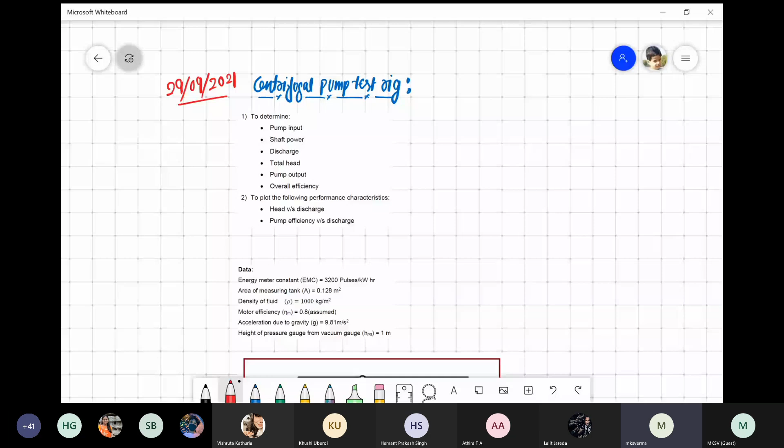So here, if you see, can you see the screen, guys? Yes, sir. You can see the screen, right? Yes, sir. Okay.

So I think you have already studied the centrifugal pump in the fluid mechanics course: what the centrifugal pump is and what its parts are. So can anyone tell me what parts are inside the centrifugal pump? You can tell me one by one. I will write them here. Sir, impeller. Okay, so first is impeller. Second one. Shaft. Okay.

Any other? Yeah, Vishruta, you are telling something, right? Yes, sir, I said suction nozzle. Suction nozzle. Okay, we can say the nozzle. But still, if I have these three parts, I don't think I can pump the fluid or water, right? Sir, motor. Okay, that's good.

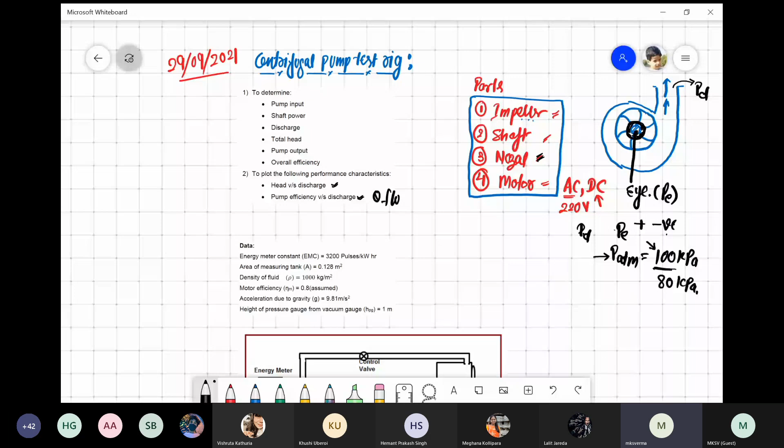So when I say discharge, it means the flow rate. Okay? So you can say liter per minute, or a more appropriate unit is meter cube per second, or meter cube per minute. You can also write meter cube per hour, whatever is appropriate, right? So whenever we talk about the flow rate, we are looking at meter cube. Okay, so you can convert that. There is a way you can measure it.

So when you want to plot this head versus discharge and pump efficiency versus discharge, what are the parameters you have to determine? Right? These are given here, like you should know the pump input. When we say pump input, what is that? There are two things. One is the energy you are putting in the motor, this one, right? In this test rig, I think we have a DC motor. So you will be using some voltage and current, right? So you can calculate how much energy is given to the motor.

Now, that's the actual energy you have put in the motor. I will say that this is my motor and it is connected to the pump, right? So this is the pump and this is the motor, right? So I'm putting some energy here, right? I can call it EM.

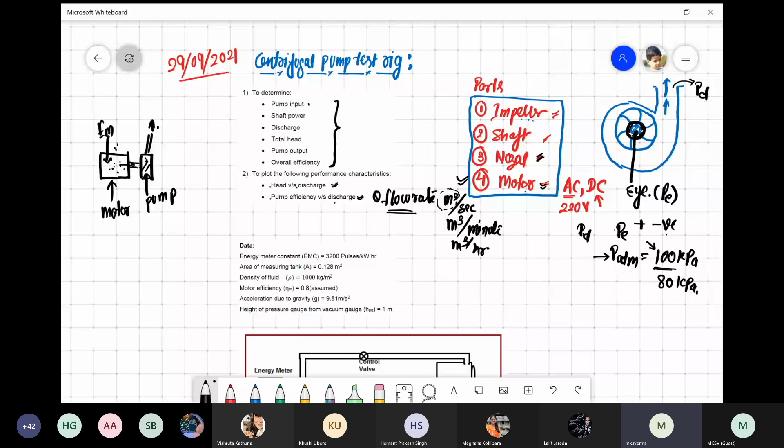So those things we will be measuring, and how are we going to measure them? We'll just go and look at our setup here. If you have any question in between, just feel free to ask. We'll go slowly. So here, as we have mentioned, you can see we are giving this energy to the motor, right?

So if you look here, this is our setup. Here we have the energy meter. This one is the energy meter. It will tell you how much energy we are giving to the motor, right? Then this motor is connected to the pump through what? This is the shaft.

Now, what are the other components in this setup? We have here two pressure gauges. One is called PD, the discharge pressure. And here we have a vacuum gauge, right? So it will give you the negative pressure. So this is called PS. We wrote here PE, but you can take it as PS, right?

Now there are two control valves. One is this one and another is this one. What's the need? We will see that. And there is this measuring tank. So why do we have a measuring tank here? With the measuring tank, for a given RPM, we can find how much water this pump is pumping, or what is the flow rate or discharge. That we can calculate using this measuring tank.

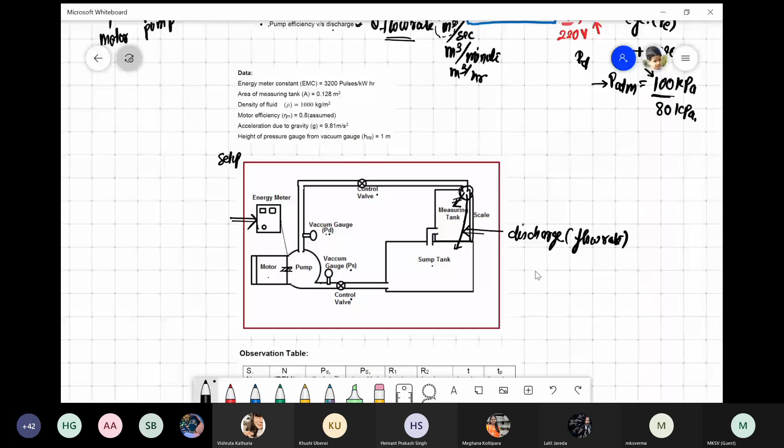Now there are a few parameters given in the manual. These data points: the EMC, energy meter constant, which is just meter specific. So these are the constants given. Area of measuring tank, this one.

If you know the area of this measuring tank, then you just have to measure how the height is changing, height as a function of time. Based on that, you can convert to flow rate: area multiplied by height gives volume, and dividing by the time delta T gives the flow rate. And density of fluid: we are using water, so that is 1000 kg per meter cube.

Motor efficiency: whatever energy we are putting into the motor, it may not all get transferred to the shaft. The shaft energy is the actual energy transferred to the pump. So we should know the motor efficiency. Normally when you buy a motor, the company gives you its efficiency.

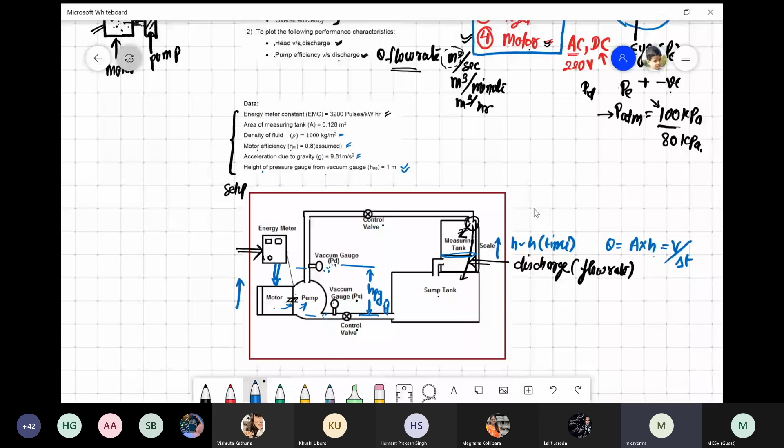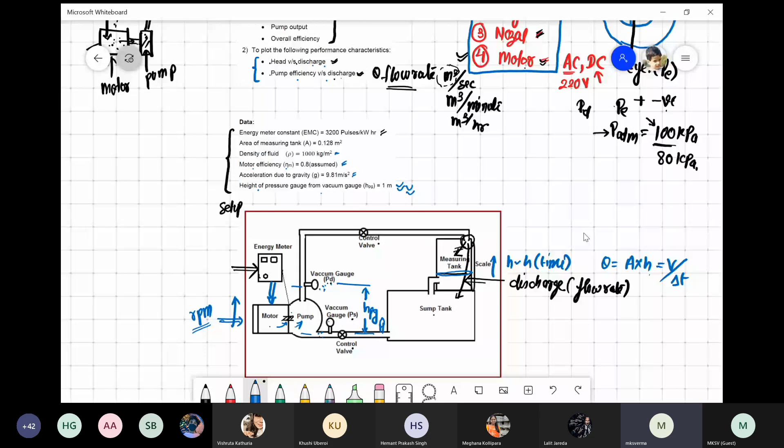Now, these are the two objectives: head versus discharge, and pump efficiency versus discharge rate. In your video you might have seen how to start the setup and how to change the RPM of this motor. Because this is a DC motor, changing RPM is easy: just change the voltage. Other AC motors can control RPM too, but this is the simplest setup. You fix the RPM, then look at the discharge and the gauge pressures.

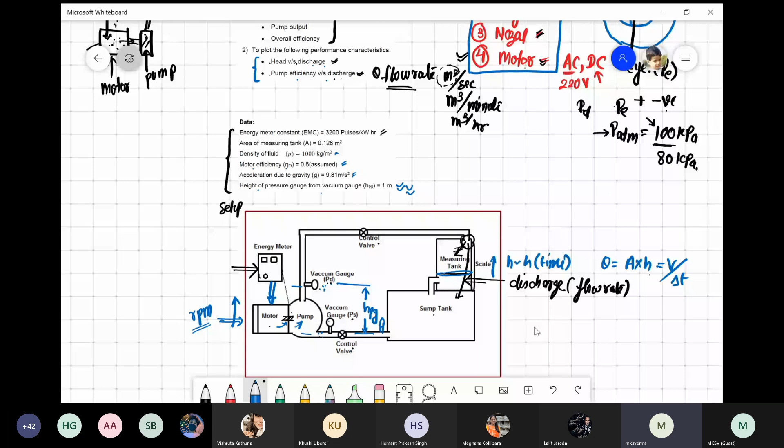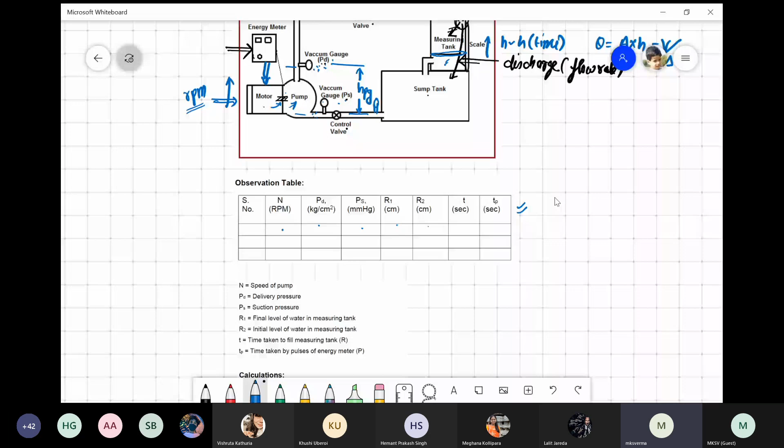So this is the observation table where you fill in the RPM, PD, PS, R1 in centimeter, R2. So what are R1 and R2? Let's see. Final level of water in the measuring tank. Let me show how this measuring tank looks. This measuring tank has a glass.

Yeah, any question? Hello?

Any question? Okay, if there are no questions, that's fine, right?

So what are these R1 and R2? They are actually here, those readings. So these are this tube height here. Suppose I have waited like 1 minute, then I'm discharging the water here that is coming from the pump. So what will happen? It will keep rising, right? And it has reached a certain level. This area we know, what is the cross section area? This is A.

So what will this R1 and R2 give? It will give me the height change, this water level change here, directly, that I can use to measure my flow rate. And what is this T? This is the T, you have one, actually this is a stopwatch. So what you can do is switch on that stopwatch and calculate how much time you have spent between R1 to R2. That's delta T. Based on that, you can calculate the discharge rate.

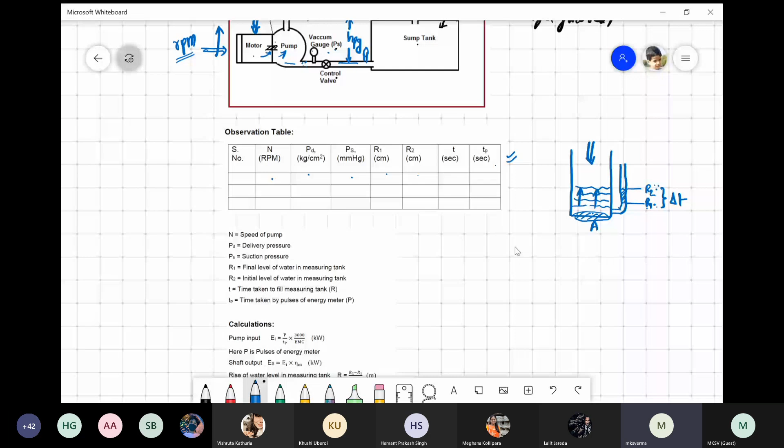Sir, why is PD more than PS? Okay, why is PD more? Because, as I know, fluid flows from high pressure to low pressure.

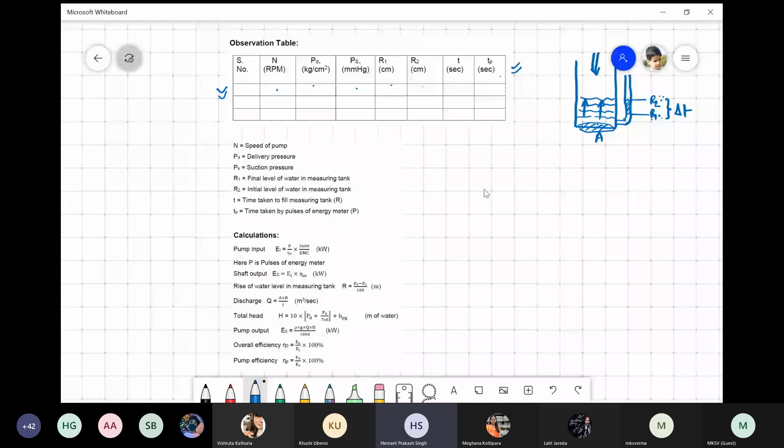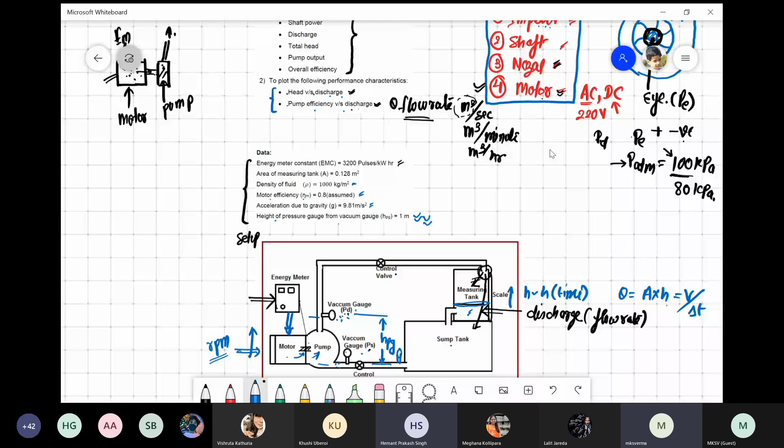Okay, but what is happening? Let me see. What is the working principle of centrifugal pump, you know, right? What is happening, the water is... have you studied the forced vortex? Yes sir. So what is happening, this impeller, right, it is rotating. And when it is rotating, it is actually creating some kind of vortex here. And if some fluid element is here, it is rotating. So what happens if it is rotating, let's say, with some angular velocity?

So what will that generate? It will generate one centrifugal force in this direction, right? It's like you take one stone, put one string and rotate it faster. What will happen? It will generate centrifugal force, right? This centrifugal force is actually resulting in this pressure head, whatever this pump is generating. So now this centrifugal force wants to move the liquid from here to here. So here, let's say this is the PD, right?

Now if you look at the continuity equation, whatever fluid is there, if it is moving from here to here, then what will happen? Some fluid has to come and occupy this one, but if you look in terms of pressure, there will be lower pressure here. That is called, so they have taken here PS, right?

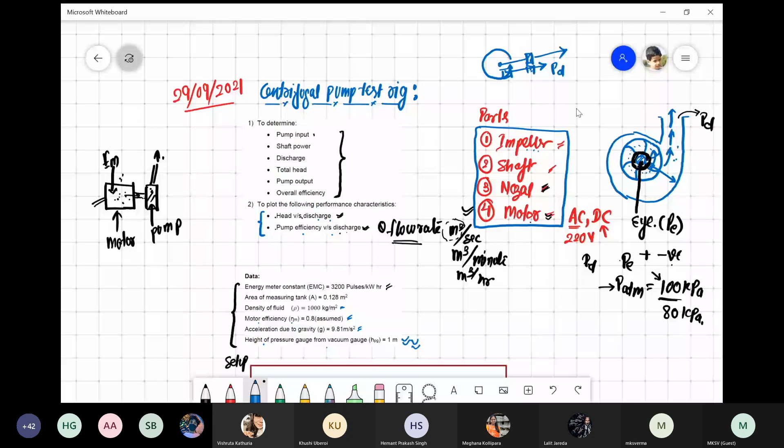This is the mechanism by which you are getting these two pressures. Is that clear? Yes sir. Because whatever fluid element is, because of centrifugal force, it has to move in this direction. So actually it is not pressure driven flow. If you see, it's a centrifugal force driven flow, you can say that.

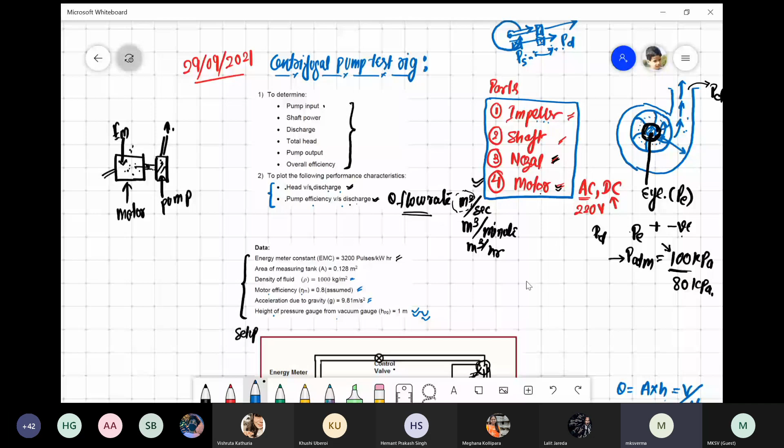But so here you are right that it is moving from low pressure to high pressure. But if I talk about here to here, now you tell me, here to here, what is the flow? Is it a pressure driven flow or not? Now you have high pressure here, right? As you go along this tube, this high pressure is actually pushing the liquid to this discharge tank. So here, this is the case of pressure-driven flow.

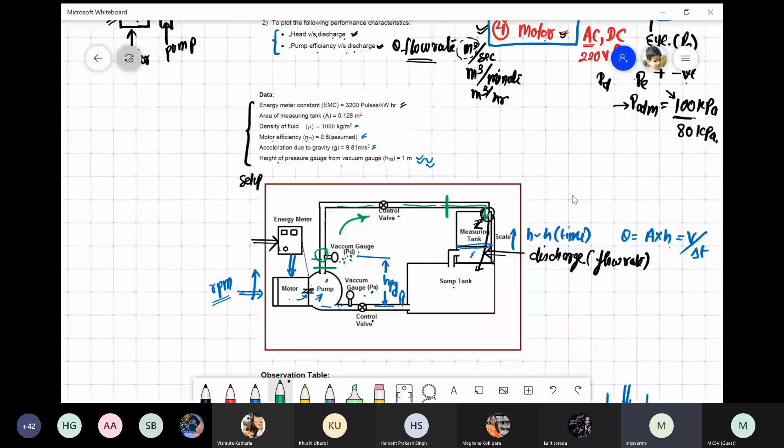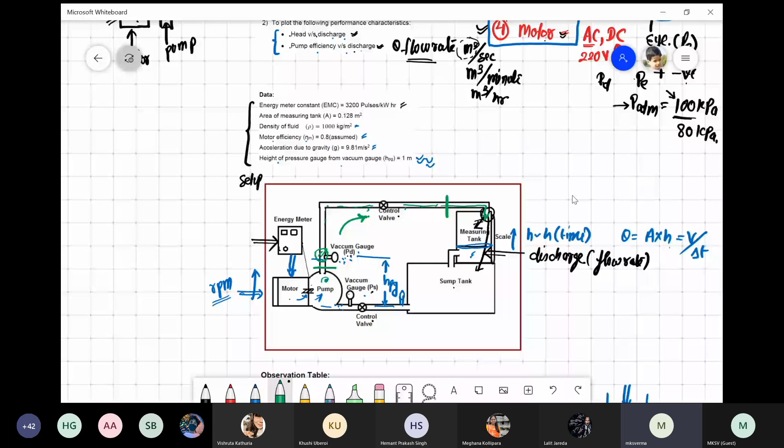I just talk about the pipeline, that's all. But this pressure is generated by what? This pressure is generated by the centrifugal force, right? That's why it is called the centrifugal pump. Is that clear? Yes sir.

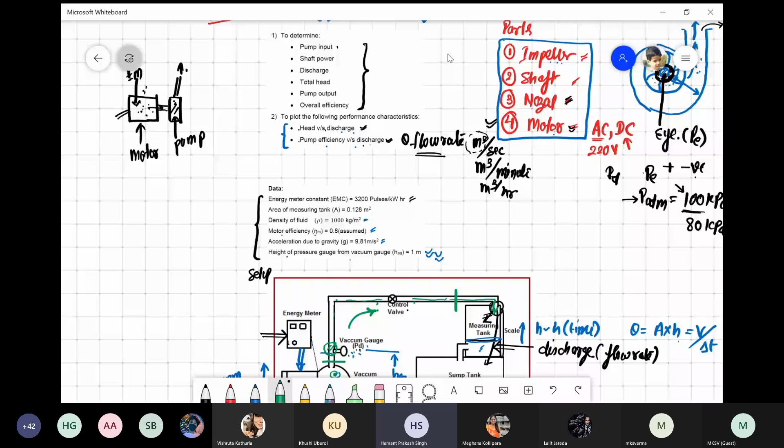And what happens from sump tank to this pump? Okay, but okay, so what happens, right? So two things are there. When I'm running this centrifugal pump, there should always be liquid inside this pump. If liquid inside the pump is not there, then it will be freely rotating, and that is not good for the motor. That is one thing. So now the question comes, why do we want to keep this sump tank?

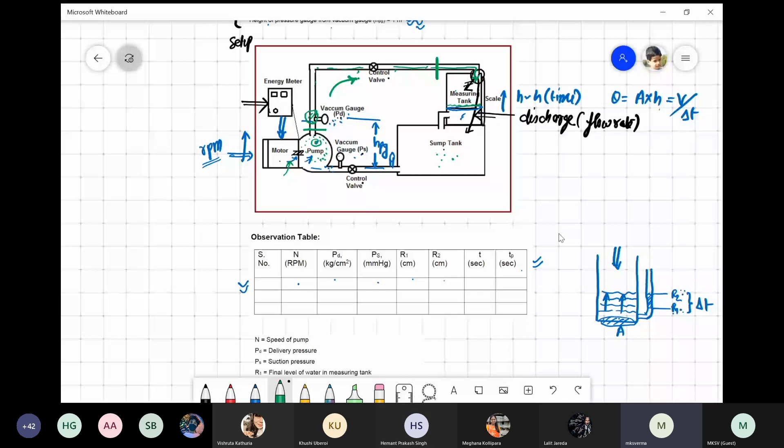While I'm measuring this flow rate discharge, I'm just collecting this liquid in this loop. If I don't have sump tank, then from where will the water come? Let's say it was directly connected to this pipe. Now, to measure this flow rate, I have disconnected it completely. Now all the flow rate is going to the measuring tank. So what happens if there is no water in that? Suddenly there will be cavitation, and suddenly there will be no water inside this pump, because all the water has just been pumped into this.

In that case, what will happen? This impeller will be freely rotating at higher RPM, and that will actually damage the pump. So to facilitate that, when I am measuring, there should be some backup water. That is this sump tank. So even though there is no discharge water coming for a short time, there is still enough water that can circulate.

I was asking from sump tank to the pump - is it pressure driven or centrifugal force driven? No, it's pressure driven, because when we talk about centrifugal force, until it reaches the eye of the impeller, there is no centrifugal force. So it's a pressure driven force, right?

Here, what is happening? This sump tank is open to atmospheric pressure, right? And what is the eye pressure here? Eye pressure is lower than the atmosphere. So still here also, it is pressure driven flow, right?

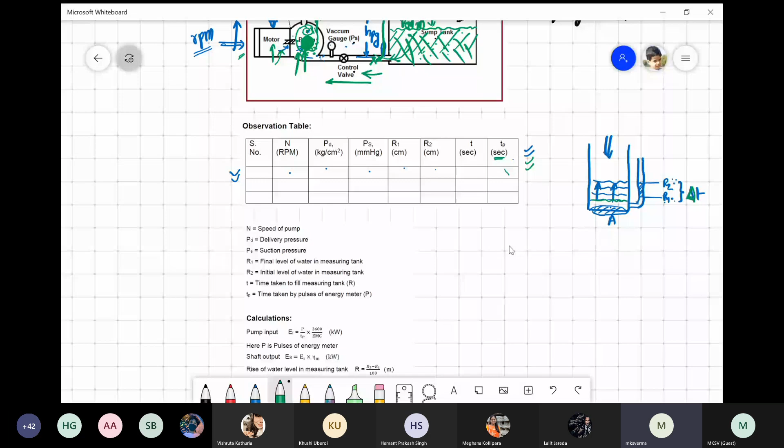Let me check this one. Okay, yeah, there are two things, right. So TP, this one is for the energy meter - 1 minute. This is for the energy meter, right?

So let's look at how we are going to use the TP. As I told you, we should know how much energy we are putting into the motor, right? This is the energy, right? Now, two ways are there.

If you ask me, simply I should know the current and I should know the voltage. I can multiply and I can get the energy. Is that correct? Yes, sir, a simple way, if we don't have an energy meter, right? So what you need to do is multiply by time as well, otherwise this is power only.

Yeah, that you can do. So the current you will get, you have to convert to watt, right? So this is watt-hour something. So this will be if you run it for 1 hour. But what information you should have? You should have these two.

So suppose that you are feeding this one, right? So you have one multimeter where current is passing. And there is also one voltmeter, which you will connect between these two things - this is volt and this is ampere, right? So then we can get how much energy we are putting inside this pump motor. Is that correct?

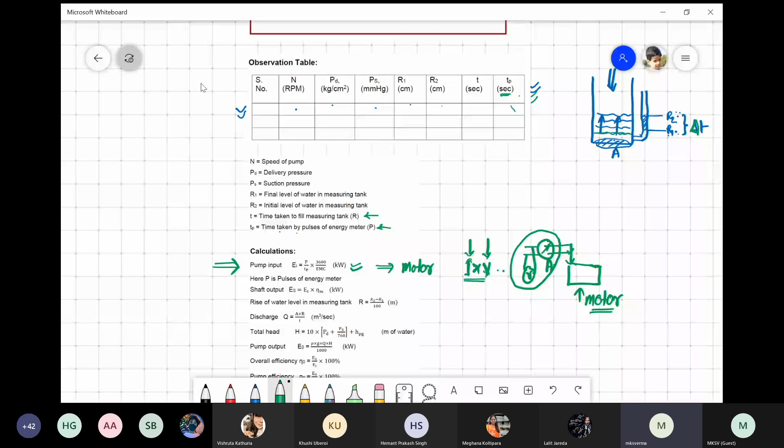In this case, we have direct this energy meter. This is the energy meter here. So we don't need to get the current and voltage separately. You know, at our home we have an energy meter.

Yes, sir. Have you seen this energy meter? Someone from the lab is there right now. Can you tell me what kind of energy meter we have here?

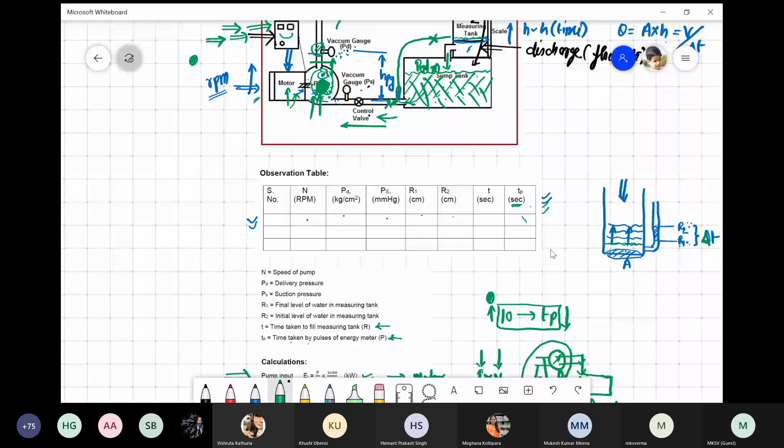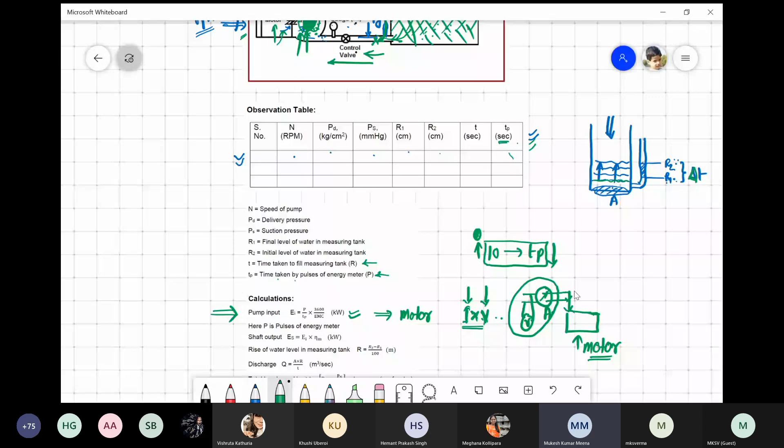So you are saying the energy consumed between two blinks is the same, right? So if we are asking for more energy, that means the blinks will be faster.

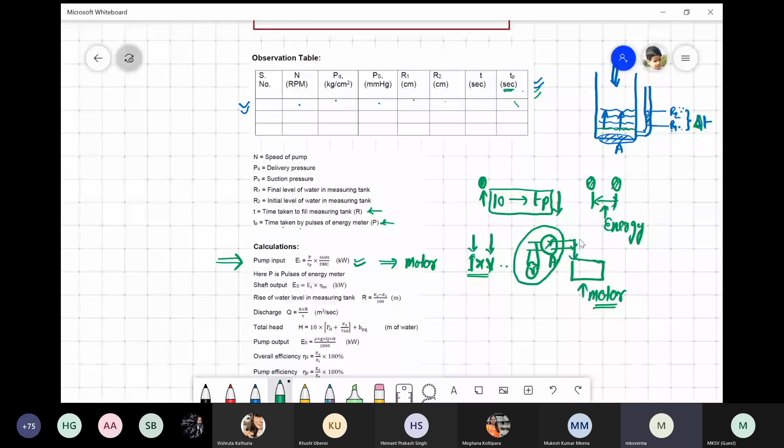Suppose I'm running at 1200 RPM, right? And these are the 10 blinks, right? It has taken, let's say, 20 seconds. This is the TP associated to 10 blinks, right?

Now, if I am running this at 600 RPM, what does it mean? Will it take more time or less time? Sir, more time. We don't have the exact relation, but we can say it will take like 50 to 60, let's say 50 seconds. Is that correct?

Please confirm. Hello, am I audible? Yes, sir, you are audible.

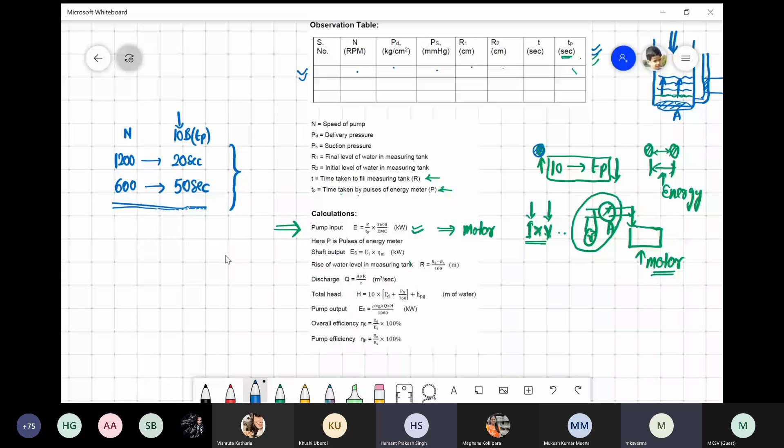Yes, sir. Are these energy meters similar to what we have at our homes? Because I can see my energy meter also blinks with LEDs. So, what used to happen, if you guys might have seen, right?

The old energy meter used to have one disc, and that disc used to have one red point. So suppose sometimes I'm just running a fan, then that disc used to rotate at a very slow pace. But when I run, say in winter, I switch on my heater, that disc used to rotate faster, right? What does it mean? One circle, meaning one rotation of that disk, was fixed for some unit, that was called a unit. So one rotation, one unit. The moment I consume more energy, it rotates faster within the fixed time, right?

So it will rotate more times, means I am consuming more energy during that given, let's say, 1 minute. Now, in this electronic meter, right now we don't have those. Now we have an electronic meter, so they might have put this LED. So this blink is nothing but similar to that rotation. So this single blink is what? This is 1 unit. You can say 1 unit.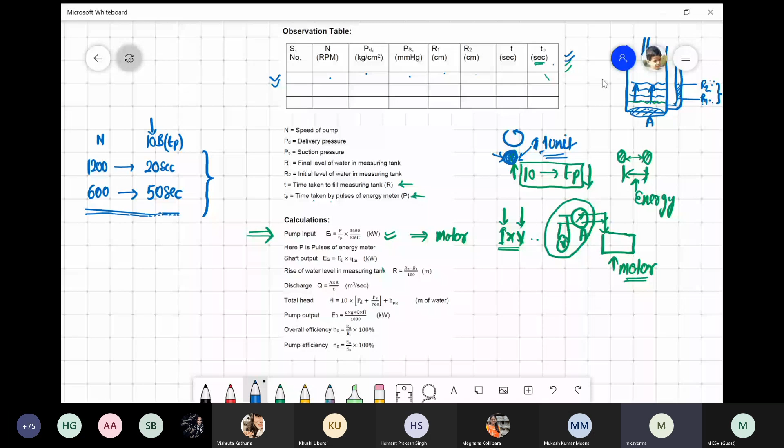Is that okay? So now there are two types. This is for the energy meter. And this is what? Discharge rate. Is that okay now? So now all the parameters are clear.

We have RPM; at a given RPM, let's say 1200, we will get one PD, one PS, R1 and R2, right? So this is to measure the flow rate. And this is the time to measure the flow rate, and TP, at what rate it is consuming the energy.

So once we have everything, then what we can do, we can use this pump input formula. It will give us what? Actual, let me see, okay. Time taken by pulses of energy meter P, okay. So this P here should be 10 actually, if we are taking. So this P is what? This should be 10 blinks, right?

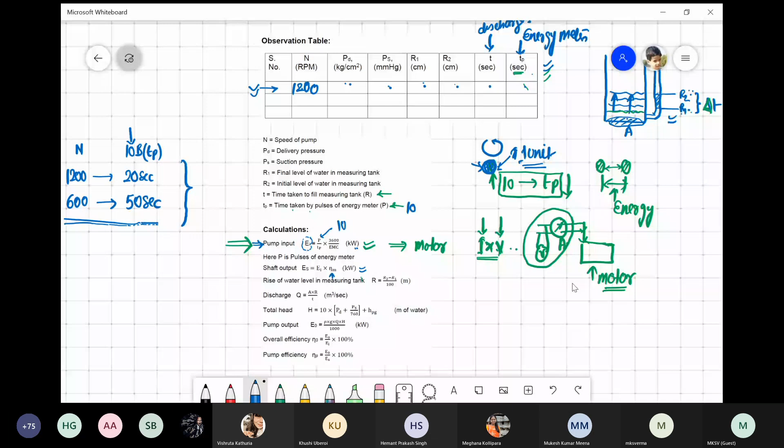So from this actually we can calculate how much energy we have given to the motor, not actually to the pump. This energy is given to the motor. Now, if I ask how much energy gets transferred to the shaft, right? Now you can use the same formula here. The motor has some efficiency that is given, and that efficiency is always less than 1. So we can see if it is given here. This is given 0.8, right? So you can use that.

So what that means, whatever energy I am giving to the motor is not fully getting transferred to the pump, but only 80% of that is getting transferred to the pump, right? Now this is the rise of water level in the measuring tank. So this will give us what? This will give us the flow rate.

So this one, R2 and R1, we can do that, and it is in centimeters, so we have to convert to meters. Once we get the height, area is known, R we know, that is the height, time we know, so it should give us the flow rate in meter cube per second. So that you can calculate, right?

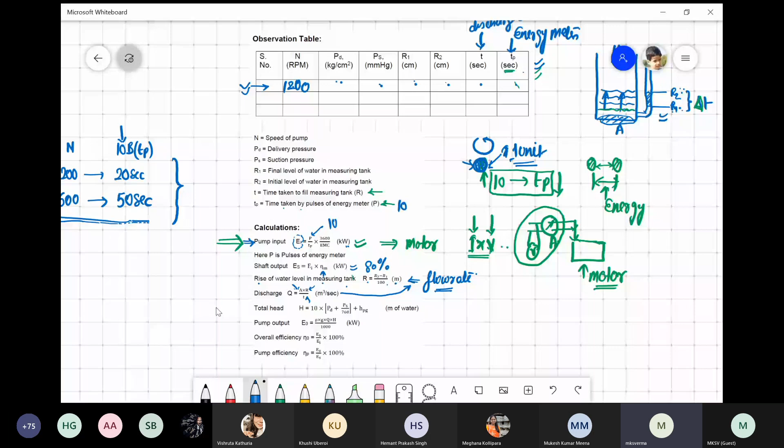Now, what is the total head? So how do you calculate the total head? So here the PD is given, that you can measure on the dial here. This one, right? So you can measure the PD. You also know the PS, because these dials are giving, I think, readings in mmHg. So what you can do, you can divide by 760.

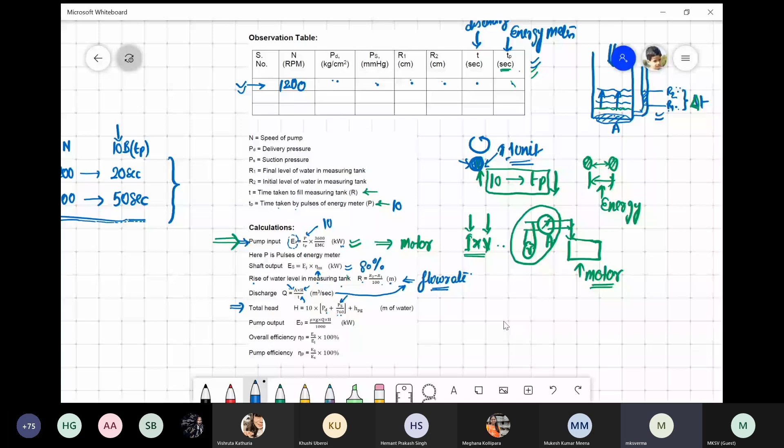Now one thing, this was also added in this one, right? This one is what? This is the same thing. We have to take care of this hydrostatic head between these two dials. So this height we have added here. So this will give us the head, or you can say the head is nothing but the water column height that we got.

Now, once we got this total head, we can calculate the pump output using this formula. But now we should know that this is the pump output, right? So when you want to know the overall efficiency, what you have to do: this was the actual power we transferred to the motor, and this is the power we got in terms of how much the pump is pumping.

As a means of measurement of this head, right? So this one will be the actual overall efficiency that includes motor plus pump. Now when you have to calculate the pump efficiency alone, not the motor, you have to use the shaft output. So you can just take the pump output and divide it by how much actual shaft energy has gone in. Using that, you can calculate these two.

Once you calculate, then what you have to plot, I will just show you the first plot. This is head versus discharge, right? Now you tell me one thing. Just suppose that there is one valve. This is the valve, right? If I close this valve completely, what will happen? What will be the head?

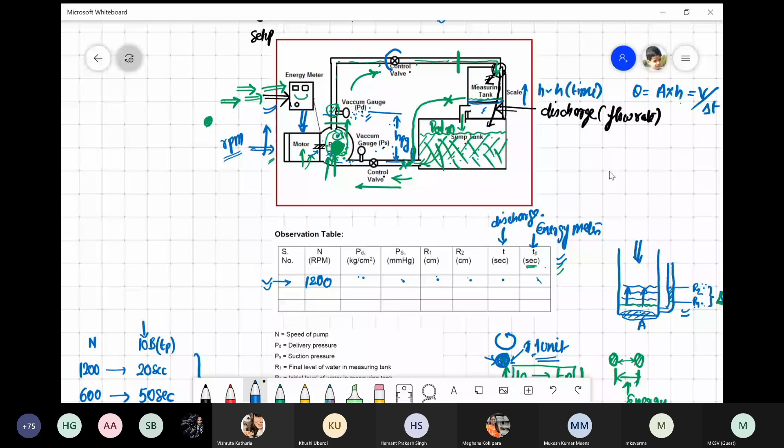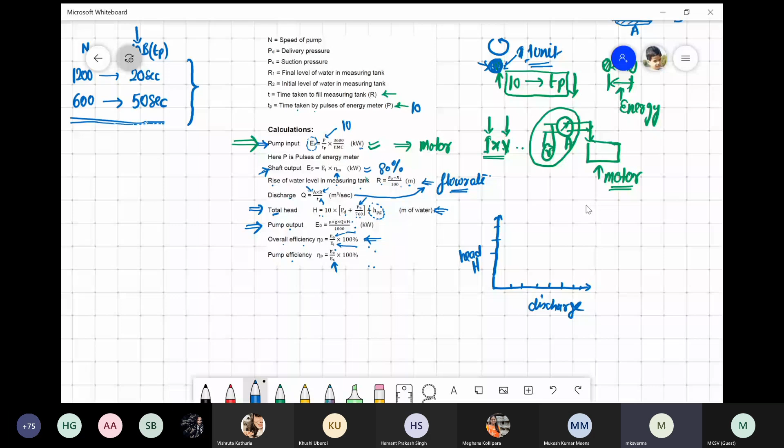So I'm just giving you 1st, 2nd, 3rd, 4th, 5th points, right? Let's say this is 4, 3, 2, 1. Now, can somebody help me with what the head will be? This is not to scale, I just put some numbers. I have just closed the outlet valve. So what does it mean? My discharge is 0. So what will be the head? When you close it, what is the height of the water column the pump can maintain? That will be the maximum, right?

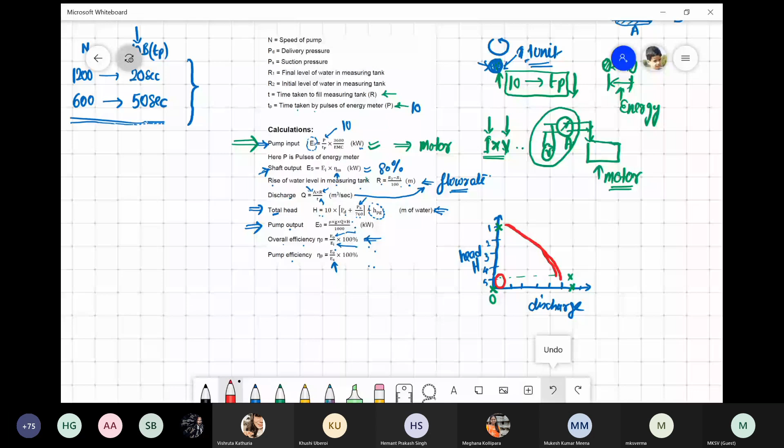What does it mean? You take one pump, this is one pipe, you make it horizontal or vertical. Vertical means there is no flow rate, so the head will be higher. And when there is flow, you have opened the discharge valve completely, so your head will be lower, right? This is just a representation, but you will get a similar plot for head and discharge. This is for a given RPM.

You have to repeat this at different RPMs also, right? So this is the experiment you have to do to get your pump characteristic, the overall efficiency and the pump efficiency. With that, I think we have covered almost everything. Now, any doubts, you may ask.

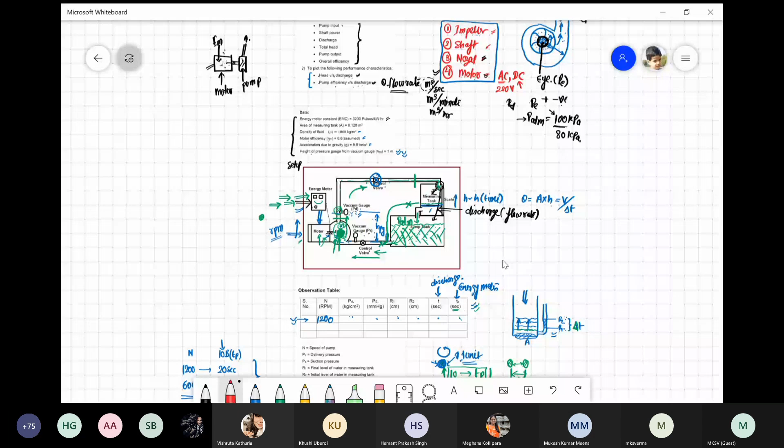Any doubt? In the doubt clearing session, you guys should ask, right? If you are not asking, should I start asking? You have the question. Hello?

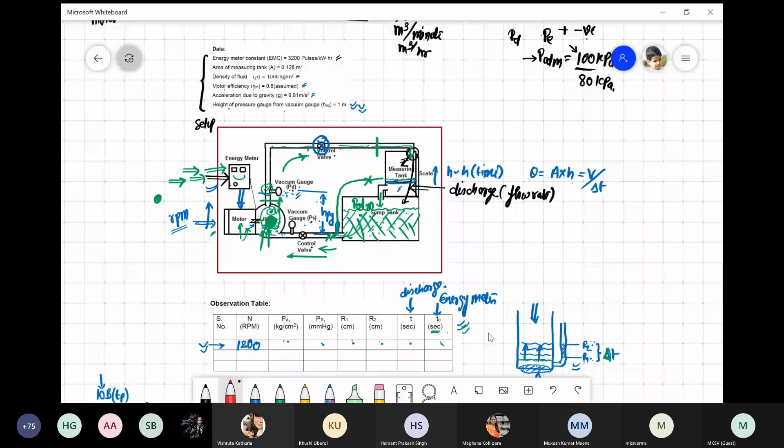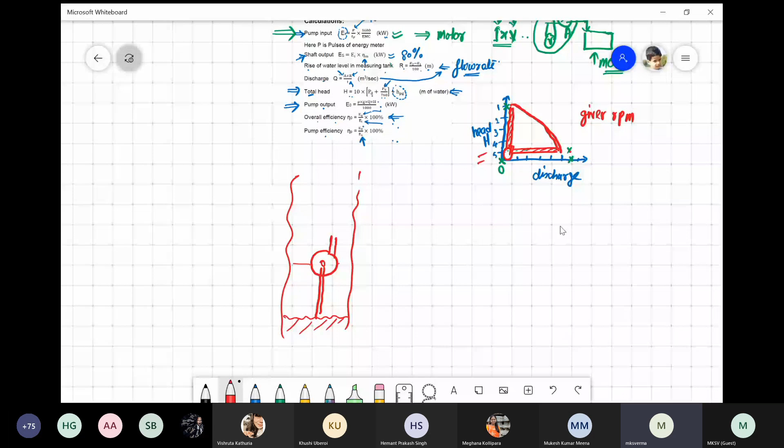Okay, so let me give you one case study. This pump is connected to one pipe here. This is one well. Here I have the water level and I have put my pump here. And here my fields are there where I have planted vegetables. Now I have to pump this water to my farm, right?

I have connected these two pipes, this one and this one, and I want to pump. I have switched on, my motor is rotating, my impeller is rotating, but no fluid is coming out of this pipe, right? So I'm thinking, what's the reason? I have connected everything as per the manual. This pipe is inside the water and this one is out. Still I'm not getting water. Can somebody help me understand why?

Anyone? I will go one by one. Vishruta? Yes, sir. Why am I not getting water? Sir, I'm not sure. You are not sure? As an engineer, you should not say that you are not sure, right? You should put some logic. Priyanshu? I assume Priyanshu is not there. Shruti?

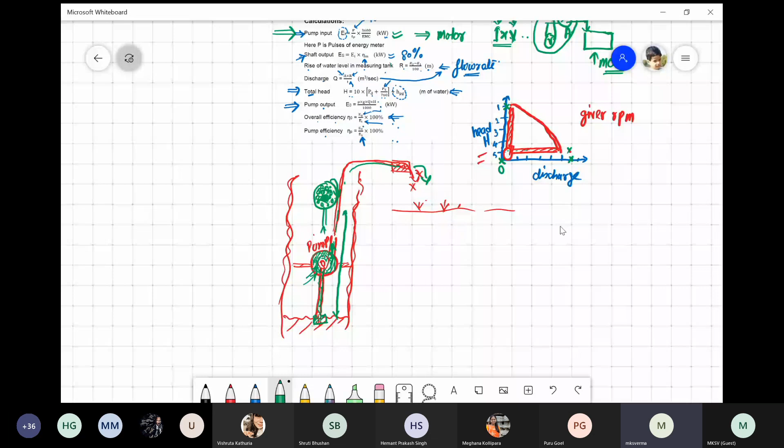Is that clear? So, sir, how could we avoid cavitation? For cavitation, the simple thing you can do is reduce this height between your eye and the water level. That is the first thing. Second, you should also know what the eye pressure is, this one, right? Once you know this, you can choose at which RPM you have to run the pump.

As we have discussed, if I want to pump petrol, I have to make sure that this eye pressure is not lower than the vapor pressure. Otherwise, it will vaporize the liquid. So you have to design those parameters in such a way that there is no cavitation and no bubble formation inside the pump.

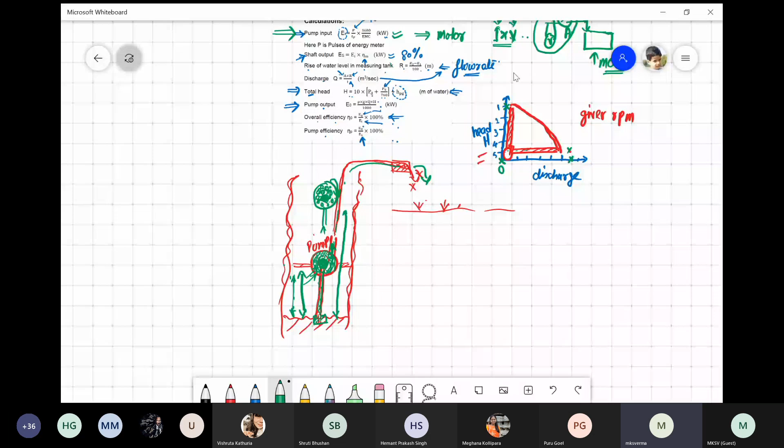To design that, you should know your pump characteristic. And that is what we are doing here. We are plotting head versus discharge and also pump efficiency versus discharge. So suppose you are plotting pump efficiency versus discharge, and what do you see? Suddenly your efficiency has gone down.

What does that mean? When the efficiency has gone down, the first thing is that cavitation has taken place inside the pump. That's why the pump efficiency has gone down, right? So you can find out at what RPM and what discharge rate you should run your pump for a given liquid. Is that clear?

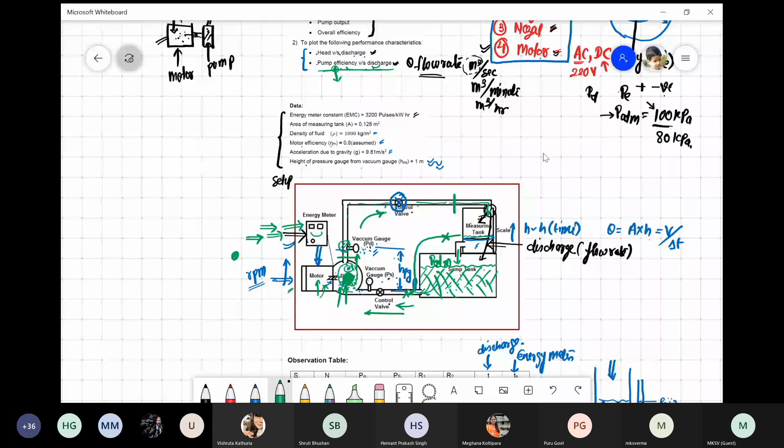Is that clear? Yes, sir. Yes, sir. So choosing the right pump is one option, but looking at the conditions in which you operate the pump is also much more important. For that, you should know the pump characteristic in terms of both head versus discharge and efficiency versus discharge. Right?